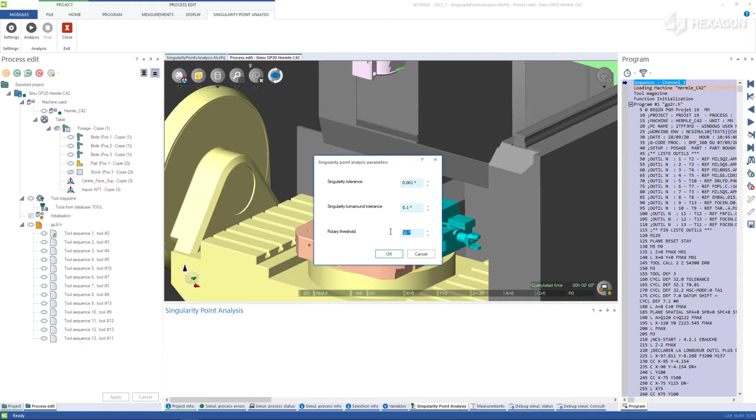When clicking on Singularity Point Analysis, it will open a ribbon where the tolerances are to be set. In these, define the limits of the singularity vectors. These values are saying that anytime a toolpath has a value between 0 and 0.001 degrees that results in a rotary motion of more than 60 degrees, throw up an alarm.

Next, run analysis to receive a report for NC-Simul's decomposition of each tool sequence. There is a quality of 5-axis column, which is showing what percentage of the tool motion is respecting the proper programmed cutting conditions. And there are also columns displaying the number of singularity and turnaround errors as well, wherein the 60-degree axis motion limit was exceeded.

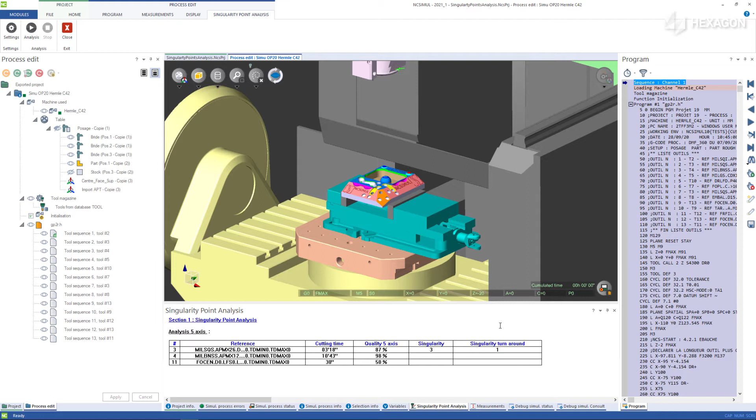Clicking on a field in the table jumps directly to the location in the G-code where the problem occurred. In the turnaround field, for instance, there is nearly a 90-degree rotation on a single block while machining in 5-axis, which makes it nearly impossible to achieve a good cutting condition in that area. There is a long travel on the machine for a very short tool tip travel.

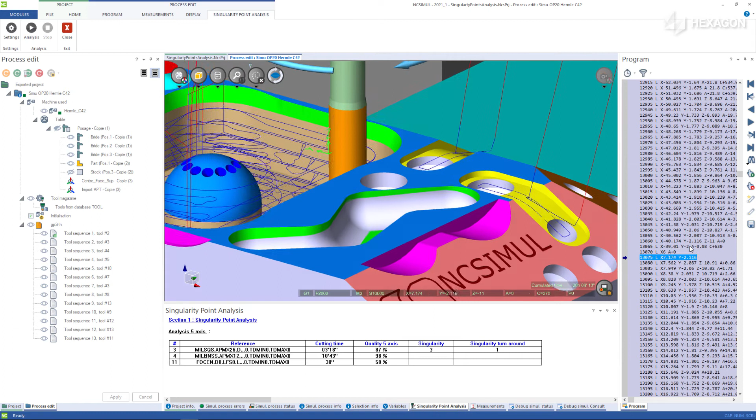Opening the status window shows the program feed rate of 2,000 millimeters per minute and the actual feed rate achievable on that block not remaining constant and only reaching about 98 millimeters per minute. The machine limits the feed rate due to the rotary axis since the tool tip is moving less than 1 millimeter in that time frame.

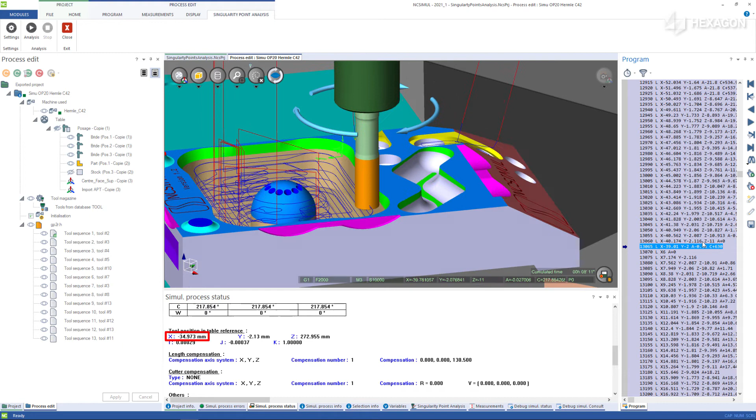All of this can be used to find the best possible setup point for the part on the machine table, limiting the distance to the pivot center of the axis, and finding the best orientation to decrease the number of singularity points. By doing this, the number of jerk moves will decrease, increasing the quality of machined surfaces, tool life will improve, and the final product will more consistently reflect the program tolerances.